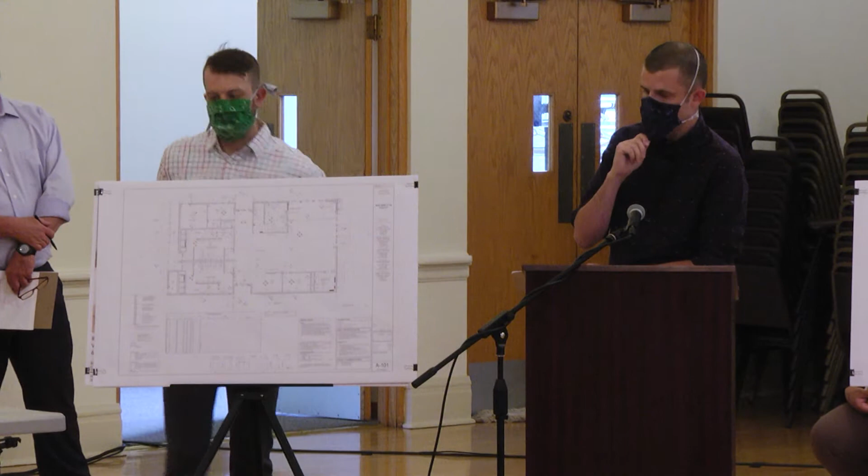Can you get the first floor plan, please? First floor plan. The interior of the facility will house men's and women's locker rooms with showers and toilet rooms. There will also be a snack bar for the warming and dispersion of food, and then a great community room that looks out over the pool, along with a manager's office, reception room, and lifeguard room.

Some of the zoning variances we're seeking are max impervious surface area, the use group, and then side, rear, and street setbacks.

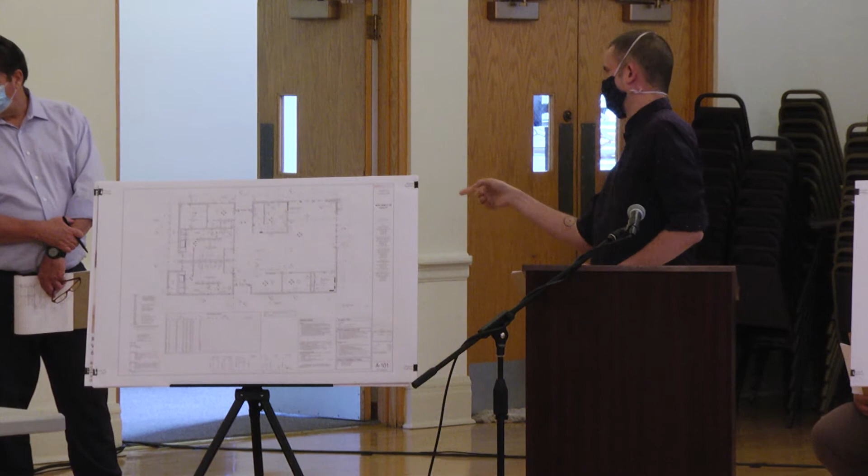The zoning, the site plan. As you can see, it's a very oddly shaped site. We also have an exhibit in the packet that indicates what the existing zoning variances are and how the existing facility is non-conforming to the zoning requirements.

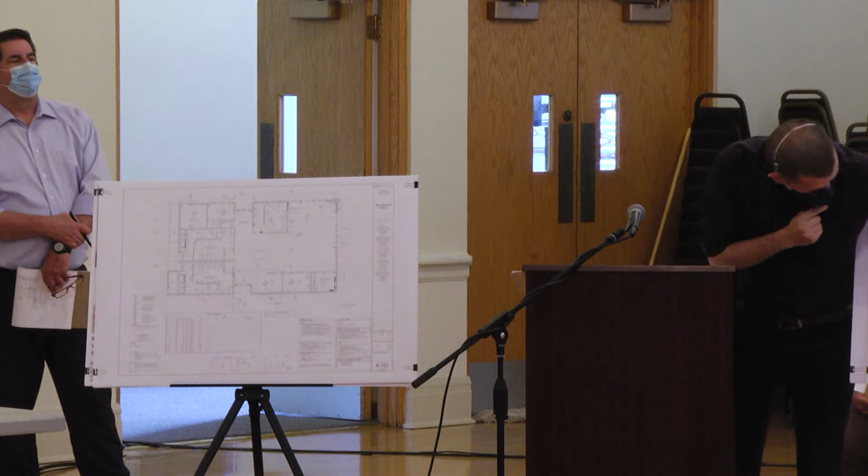With the rear yard, you can see that in this diagram. The side yard, both side yards were in compliance, and with the overall height and massing, we're also in compliance with that zoning requirement.

If you would turn to page 3 of the packet, there's a zoning matrix that indicates a former zoning of R4 with a current zoning of R1A. The previous facility had been rezoned, and you can see that under both zonings we would require variance. The proposed change is the difference between what would be required and what we're proposing in this design. Are there any questions?

I guess I have a quick question. Go ahead. I didn't see on here what the actual setback from the building to that front property line is. Do you know offhand what that is? You mean the existing? No, what you're proposing, how far is the actual footprint of the building from that street property line? I don't think it's 1 foot 6 inches, as you say in your table. So I don't know if that was supposed to be 16 feet.

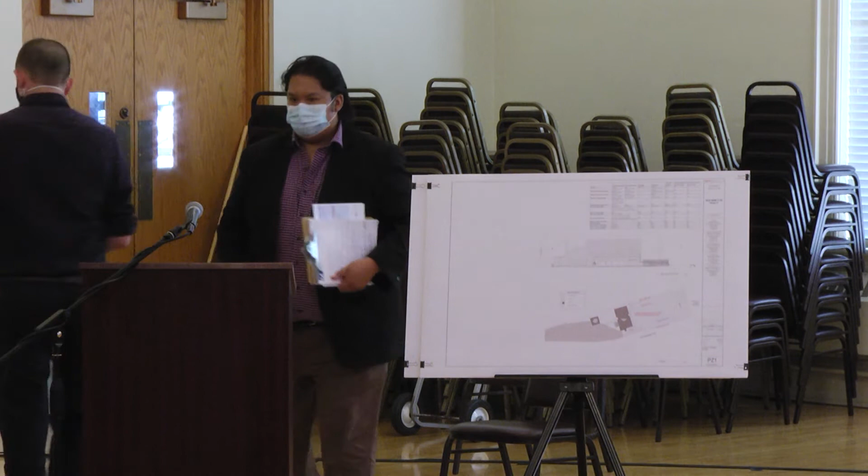Hi, good evening, thank you for having us here. Again, my name is Michael Morales, and I'm with Mackie Consultants, the civil consultants for this project. As Lauren alluded to earlier, this is for the Riverside Swim Club, proposed for the removal and replacement of existing pools and buildings.

The total area for this property is about 1.96 acres, and the total proposed disturbed area is about 1.26 acres. There's going to be anticipated new utilities for this facility, so if you take a look at the board, or in your handout, we have new water service and new sanitary to service the building.

This is under MWRD GC jurisdiction, so we will follow their watershed management ordinance and required release rates for stormwater design. As you can see on the board, there's 2 underground detention vaults, one by the flagpole area and one underneath the basketball court, and both outlet to a common outlet control structure here, which will then release to the city's storm sewers.

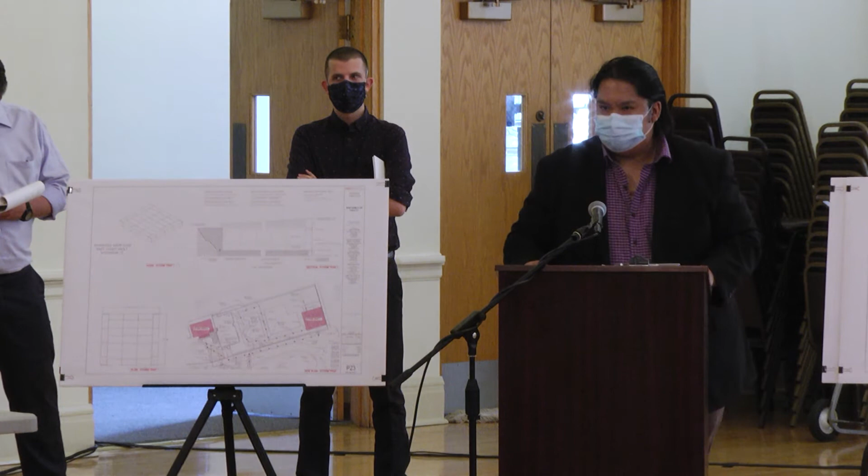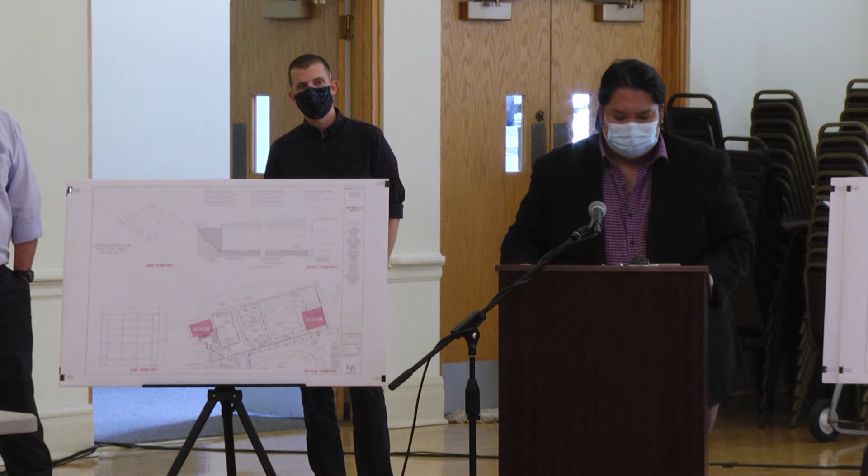The total combined detention for both of these is 0.59 acre feet. Since we are under MWRD jurisdiction, we'll also be providing volume control, with an anticipated volume control storage of 0.14 acre feet. The allowable release rate for MWRD in this part of the jurisdiction is about 0.2 CFS per acre, which means for this development's total disturbed area, we're looking at an allowable release rate of about 0.25 CFS.

So that's what I have for the civil aspect. Was there any questions?

Is there currently any on-site detention? There's not going to be any on-site detention, no. I mean currently, right now, is there any on-site? Any on-site detention? Not from what I see in the previous plans, no.

Okay, thank you. And the surface on the northeast corner, that's going to flow toward the inside of the property? Right above the storm trap one, this one right here? Yes, so within the actual pool area, there are some proposed area drains that are going to be collecting this stormwater runoff and outletting into the storm trap system. Thank you.

Any other questions? So if I'm looking at your table, the biggest delta between existing and new is the impervious surface, and this is always going to be a sticking point—50% of lot area versus what you're proposing, which is 79% impervious surface of the lot area. Has any thought been given to more pervious surfaces, or is there any possibility?

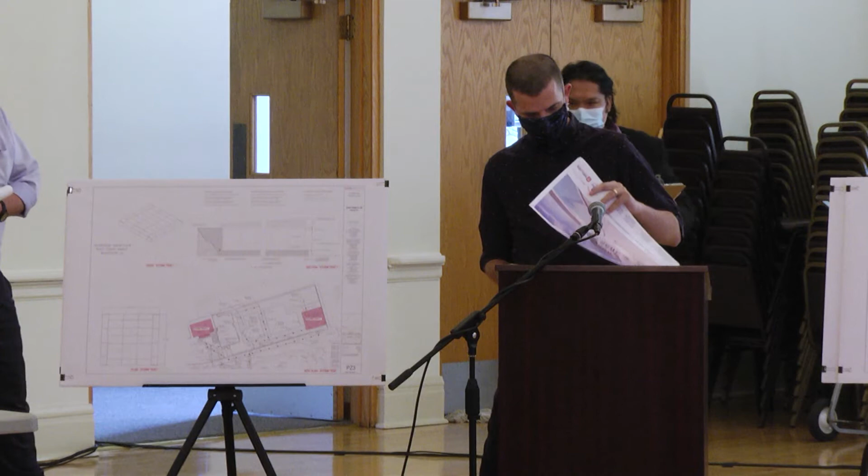Can you explain what's the difference between what's there now and the increase of 24,000 square feet, it looks like? In other words, let me reframe the question—where's the additional 24,000 square feet of paving come in than what's existing on site?

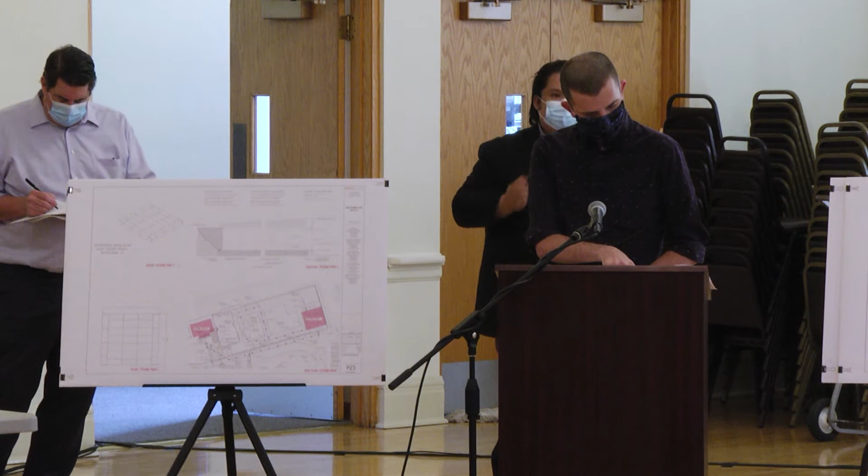You're looking at the stormwater calc page? I'm looking at your variance table for maximum impervious surface. We don't have anything listed for the existing. Okay. I mean, we can get that in there, but the site as is, where we have the pool deck right now, it is impervious surface. Okay. And we're not touching the parking lot, so we're basically replacing in kind. I see, okay.

So in your variance table, it says that the proposed impervious is 78.4%, and it also says the proposed change is 78.4%. So that's saying there's no change in impervious surface—is that accurate? I would have to double check that and get back to you before our formal submission. Okay. I do know that there's very little change between the existing and the proposed.

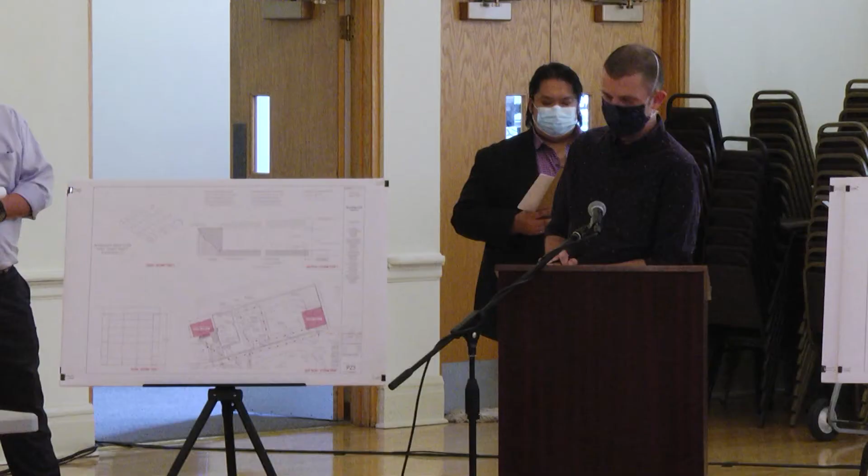It might be a couple hundred square feet maximum, but I'll get that number and get back to you.

As long as we're discussing impervious surface - so the white space, let's say it's PZ1 at the bottom, it's sort of like a footprint of the project, and there's white space. Is that the pervious surface, and have you contemplated what type of pervious surface that would be? Is it grass?

Well, between the parking lot and the building, there's a lot of white space. That's grass? That will be grass. Okay, and then further down from the parking lot, in that pointy area, will that also be grass? This area, like the tip of the property to the west? Yes, I think so.

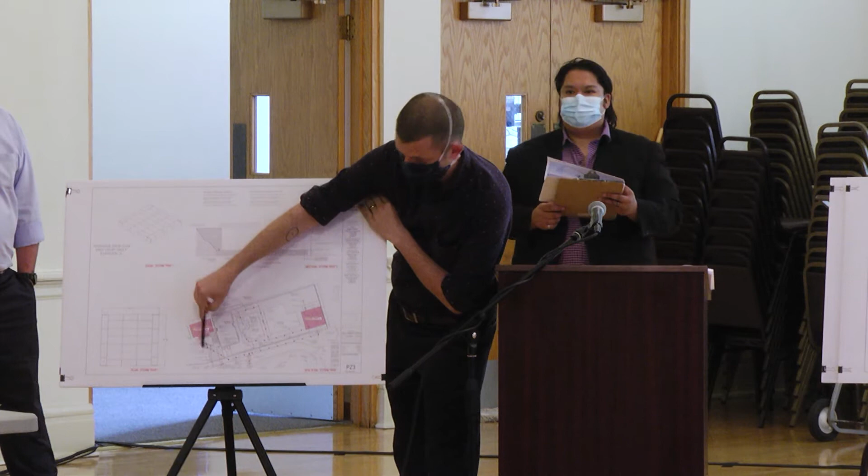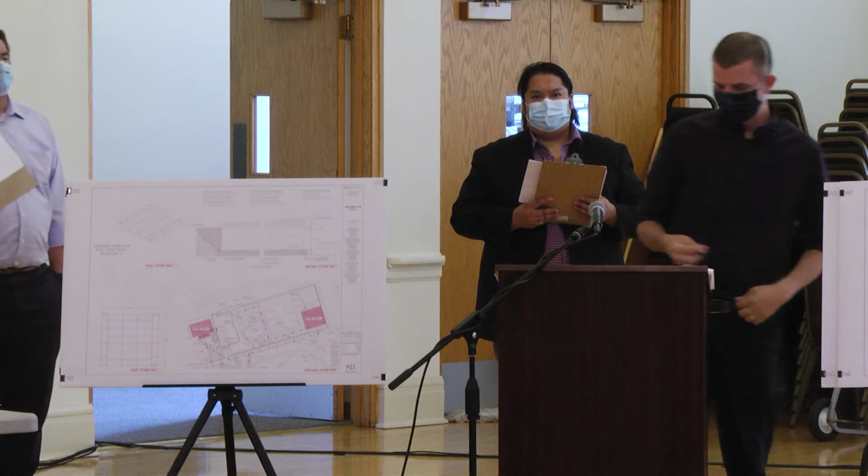Okay, so I think I would be interested, even if the pool deck can't have pervious concrete or something like that - which I think pervious concrete exists - it would be nice to have those types of surfaces perhaps in the deck where people walk, wherever that is, the cafe area, all that area, the walkways, and then maybe some kind of pervious asphalt or something for the parking lot, if you guys would think of that.

Or else have some kind of other retention there.

Was there any consideration of reducing the size of the parking lot? Our budget didn't allow it. That's kind of simple economics of the problem we were given. Yeah, but we have to think of standards to allow variations to be recommended for approval by the board, and cost is not one of the standards that we would consider.

In terms of hardships or practical difficulties - and it looks like you have more than enough parking spaces required, right? Yeah, I believe so. Parking lot's often full on certain days of the year. Yeah, on race days they're definitely parking on Blooming Bank.

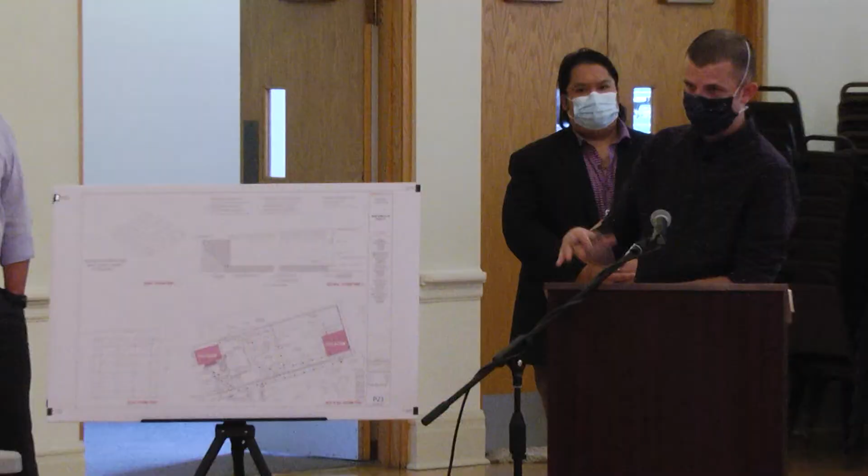Now, one thing that you're doing, though, is you're doing the underground detention to store the water, so maybe you can speak to the benefit that you get from storing that instead of having the pervious pavement. Yeah, I believe that's where our trade-off was - instead of trying to deal with some of the issues with infiltration and some of the soils on site, we decided to create these large underground vaults to restrict the water from entering the storm system right away.

Yeah, thank you for bringing that up. Yeah, that is true, and so that can be considered a trade-off for impervious surfacing. Right, okay.

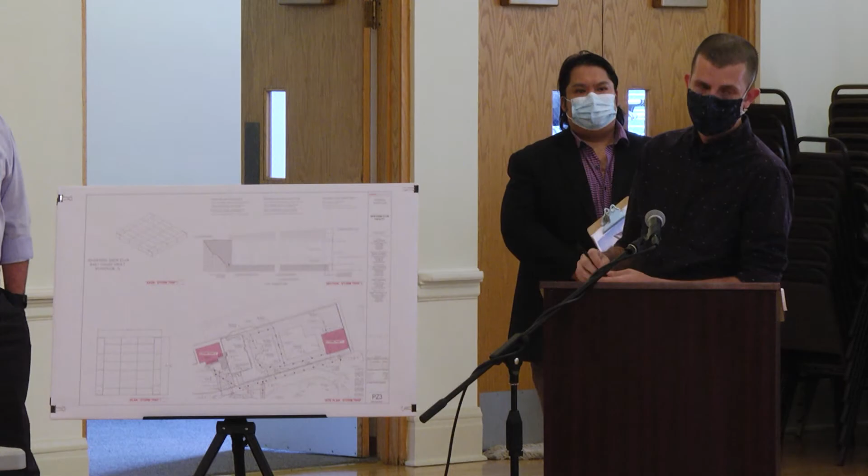Both efforts could be made - we have asked other projects to consider both efforts. For sure, yes. And the StormTrap, it's really required detention by the MWRD, so that's kind of a minimum requirement to meet MWRD standards. Right.

Can you explain for the side yard setback and the rear yard what the difference is between what exists there now and what you're proposing? Because I don't quite see where the extra feet is, given the footprint of the project now and the footprint of what you're proposing - I don't see the differences. If you could point those out. Yeah.

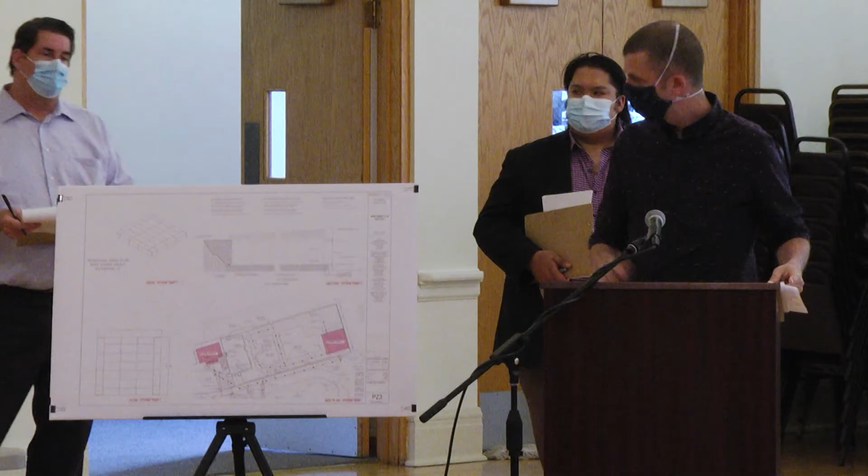So the existing side yard requirement, looking at Exhibit PZ2, the existing side yard is 31 feet, and the proposed is 25. So it's a delta - this proposed change should be a 6 foot difference.

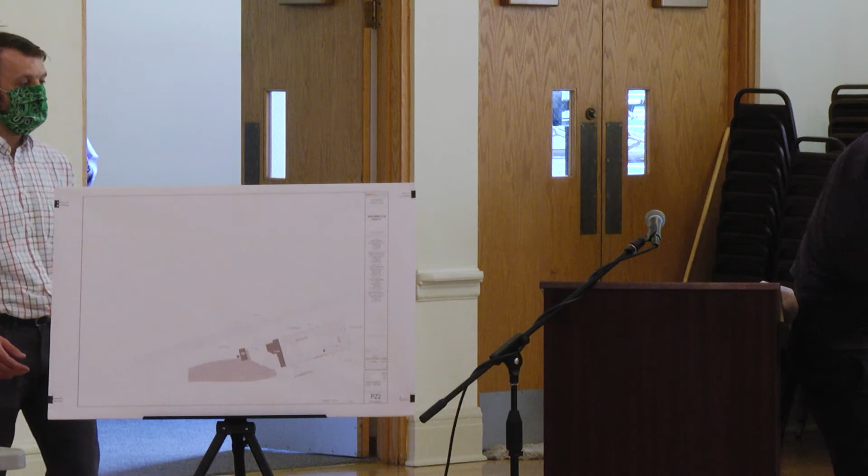So where is it measuring from? Where is your side yard setback? Can you point it to me, and what are you measuring from? So that's this side yard here, and that's a function of the location of the deck. The deck kind of comes out to hit that corner, so if we were using the existing side yard number, the deck would be in violation of that.

So it's between the building and the public sidewalk, basically - is that what you're calling the side yard? So just the offset for this from the property line, where it comes to meet the deck - this corner is controlling that number.

Okay, so the side yard—maybe, Sonia, you can help me, I don't understand. Does the side yard run along Bloomingbank Road?

No, okay, I misunderstand. I don't see where the side yard is. As I'm looking at this, I don't see the building encroaching into the side yard.

Okay, because when I was thinking side yard, I was thinking it was the yard between the east side of the property and the public property. That's what I was thinking of as the side yard. So they do technically have two side yards, it's just they're kind of like a weird little trapezoid.

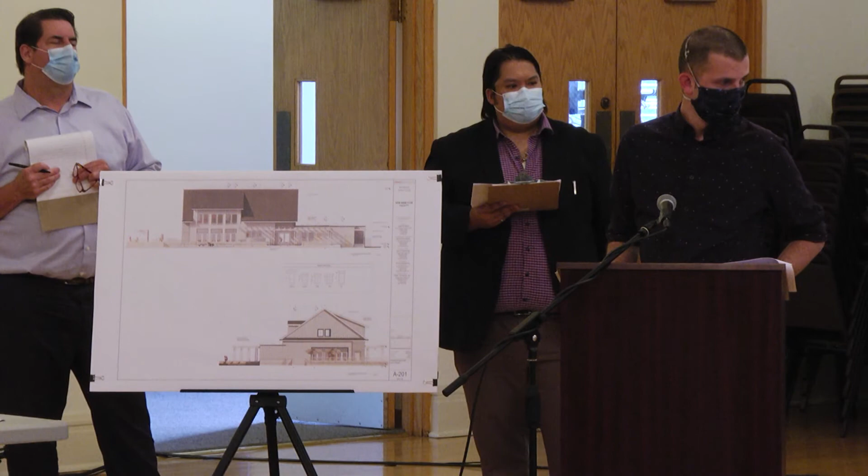We did list those on our elevations, but they might be a little hard to read. The majority of the building is like a fiber cement residential siding with an asphalt shingle roof, black metal trim and gutters, and then a painted wood trellis. It's fiber cement, like Hardie board, is that what that is? Yeah, okay.

It looks like you guys are missing sheet A203, which has your accessory building elevations. Yeah, we can get those in the next packet.

So the parking lot is the same parking lot that exists now? You're not touching the parking lot, is that right? Correct. Okay. Maybe.

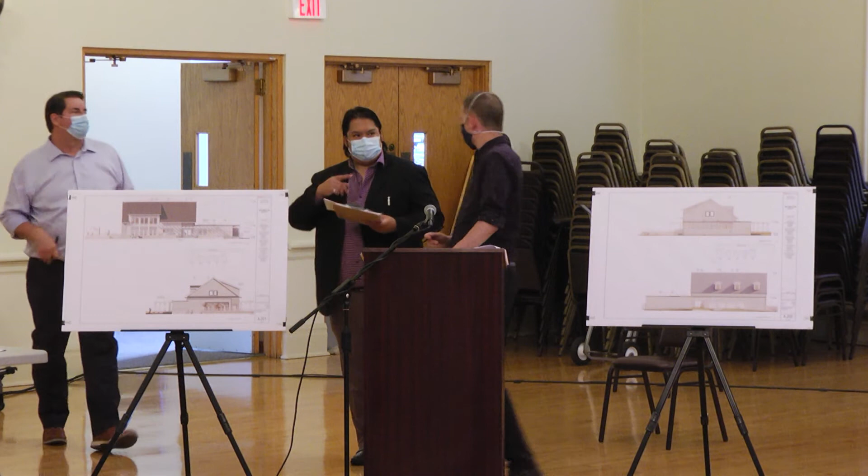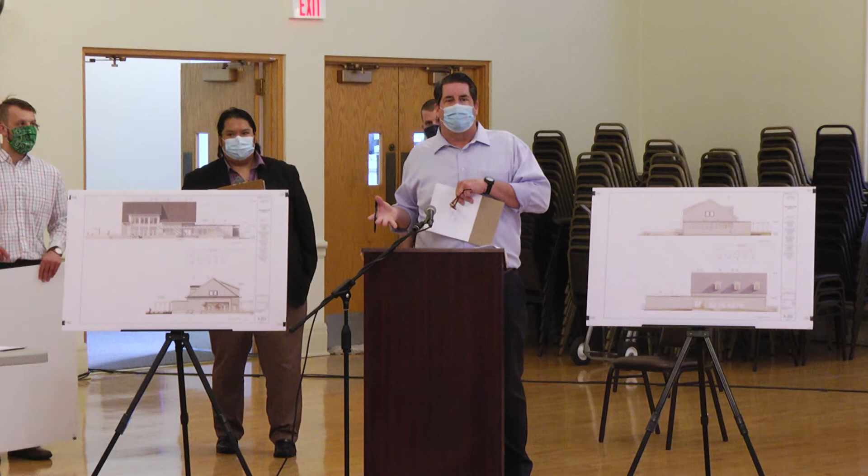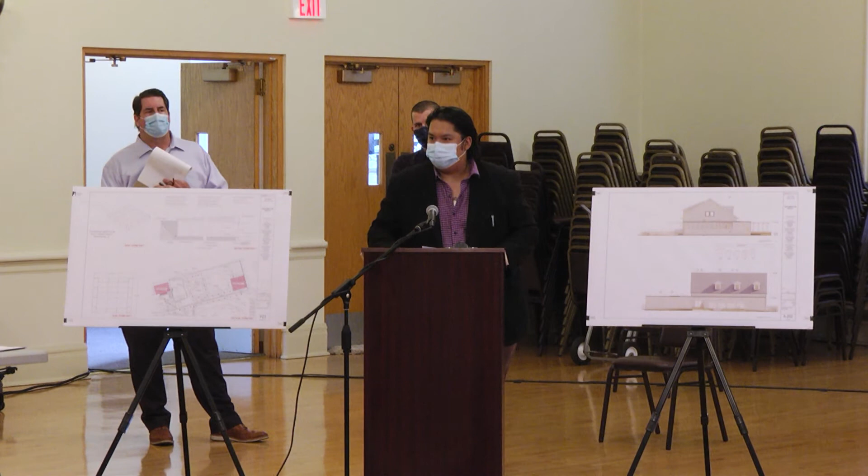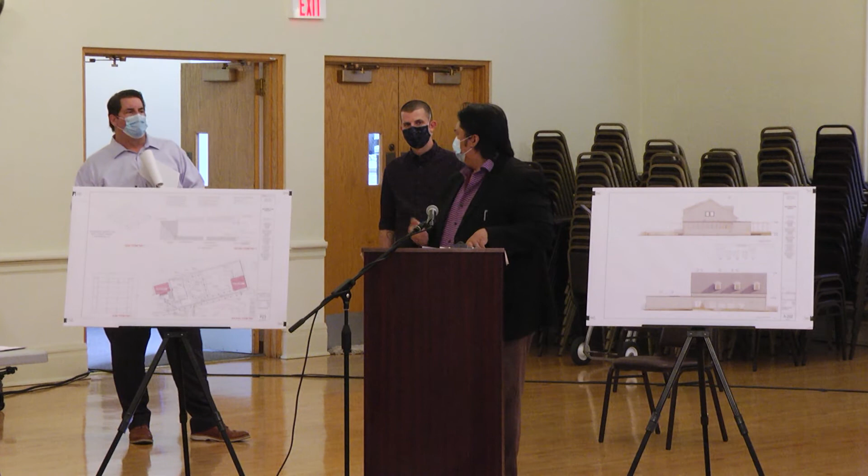The other item is that the deck area, while it's wood, underneath is just soil but it does have gravel, and it does allow for additional infiltration. Thank you.

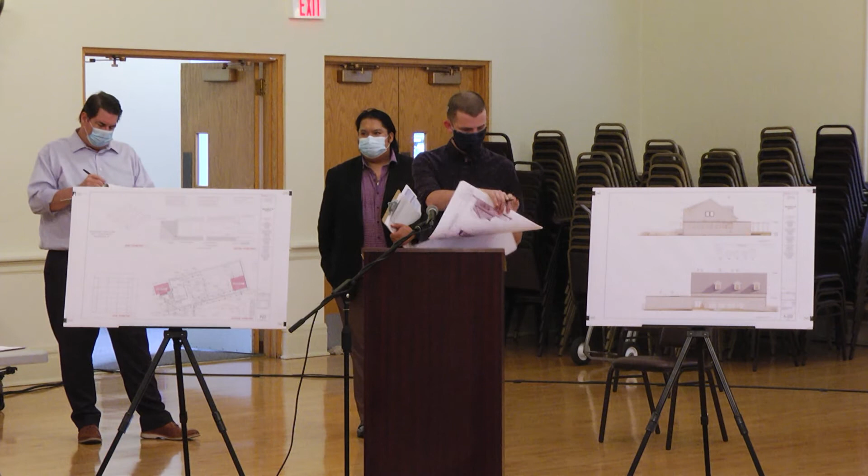Director Epp, have you had a chance to look at these setback estimates, or have you not had enough time yet? I did send them what the required setbacks were, looking at the plat of survey, so they had that information to provide what size variance they would need. Their current setback for the street yard is 28 feet, and it looks like that will remain the same. Their required rear yard is 35.75 feet, and their required side yard is just under 31 feet, 30.96, based on the width of the lot.

So they are going to require that rear yard variance, and they will require some variances for encroachments into the street yard for accessory structures, but not for the principal structure. I don't know what the existing impervious surface coverage is, but it does look like they're pretty closely matching what's currently covered. It might be a small decrease or a small increase, but it's generally about the same.

So regarding the deck that you have, that's in the street yard. We're agreed on that, right? I'm sorry, could you repeat that? Director Epp, yeah, the deck that they're proposing would be in the street yard. Is that correct? It would be in the required street yard, yes. So I just wanted to point out that under our regulations, if it was a patio, it would be an allowed encroachment, whereas a deck is something you have to get a variance for. That's correct. Do you agree with that? Patios are allowed to encroach into a street yard.

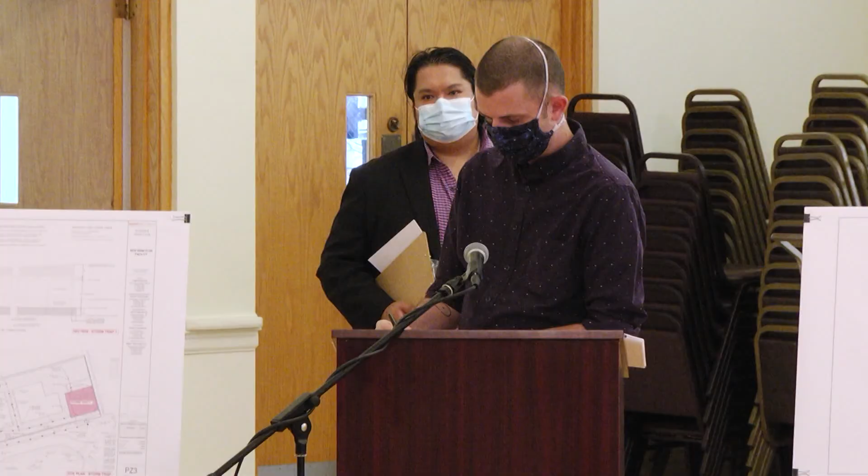And it looks like you've got gutters on your pitched roofs. Are those daylighting to downspouts? Yeah. So does runoff go onto the surface, not brought down below grade, correct? No, the downspouts direct to the storm sewer. Okay, I see, so it's captured in the storm trap. Good.

Will Santa still be on the diving board? That's the most important question. No, no, no.

What's your hopeful timeline? To come to us for a public hearing? We are ready to come to the next public hearing. So you've already started working on the application and going through the standards and all that? Yeah. Okay.

Can you think of anything else? Do you have questions for us? No, I think we got all our questions answered. Thank you very much for your time. Yeah, thank you, thank you.